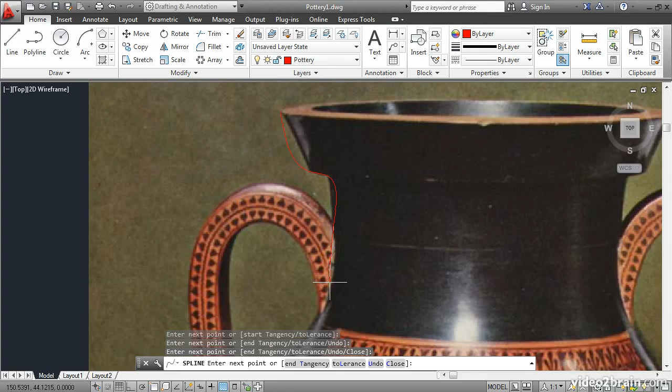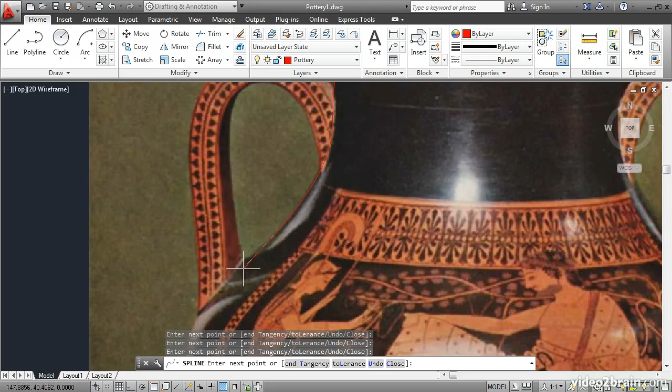Let's not worry about trying to represent the handles. Instead, we'll focus on the curve of the vase. Images disappear temporarily while you're panning. I'll pan up by dragging the mouse wheel and click some more points here, right on the edge of the vase.

I'll pan up by dragging the wheel, and we'll just come down here, click a few more points.

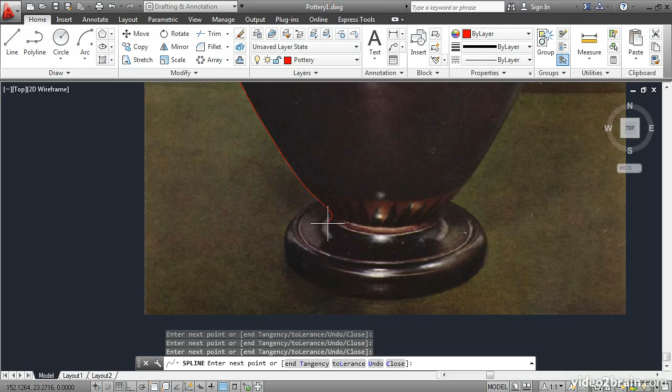Now, because this is a photograph that is underlaid in AutoCAD, we don't have a true representation of the elevation of this object. Instead, we have to kind of guess at how this base would look in perspective.

I'll click about here, have it go down, and then I'll have it go over to some imaginary point here in the middle, about here. Then I'll press Enter to end the spline command.

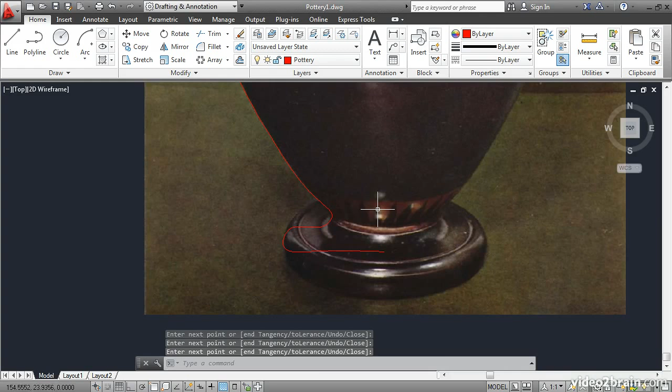I'll double-click the wheel to zoom extents, and let's try the Spline CV method on the right edge of the vase. Expand the Draw panel and click the Spline CV tool. Then zoom into the top, right edge, click the first point about here, and just work your way down.

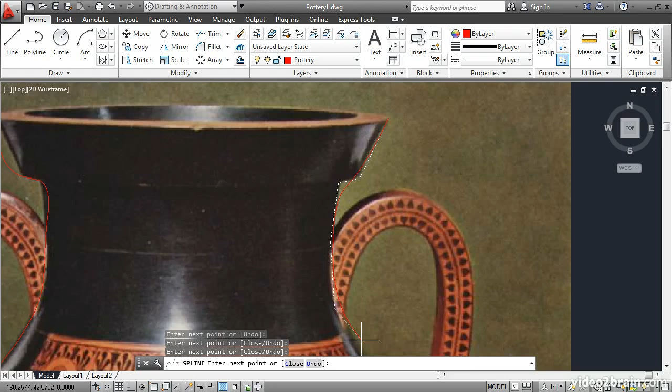Now this is a little bit different. You'll see a dashed white line appear. This is the spline lattice that you're drawing. The red line doesn't actually follow the curvature of the vase. Instead, it's the lattice that does. It's a series of control points that you're clicking, which are on the edge of the vase.

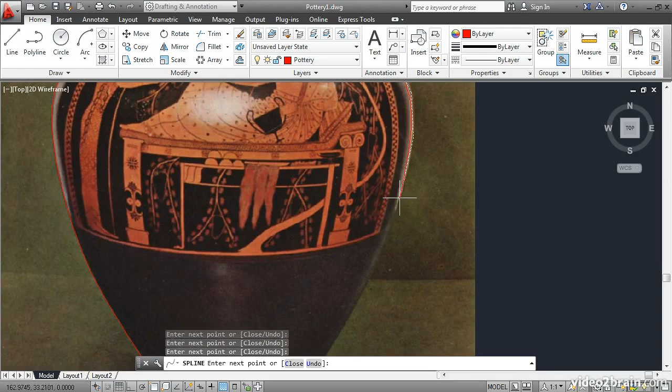So because of this, the CV method isn't the best one when you're tracing edges like this in a photo. See, the red line is inboard of the actual edge of the vase.

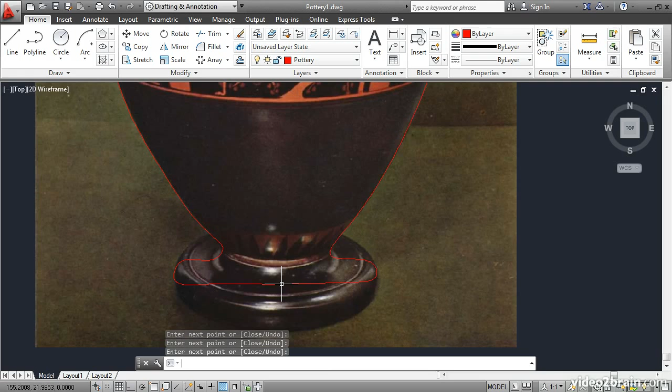I'll come down here and just complete what I started. About there, and press Enter. Now I'll double-click the mouse again to zoom extents.

Now of these two, I think I like the left spline better because it more closely matches the shape of the vase.

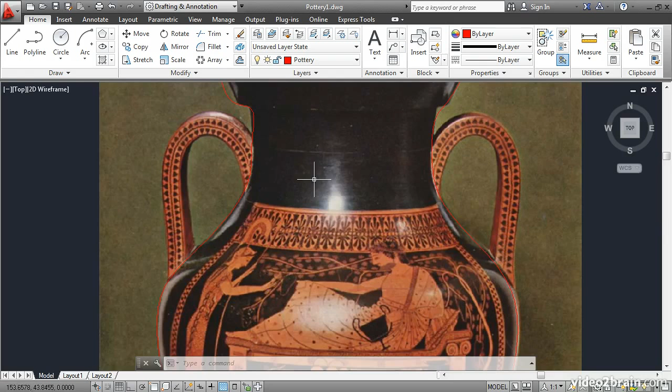Now I'll select it, and you can see the grips appear. These are the fit points, the actual points that I clicked earlier.

If you double-click the spline itself, you automatically launch the Spline Edit command. And here you can use some of the options to change the shape of the spline.

In particular, I'd like to introduce a kink into the fit data. So I'll use the fit data option, and then I'll click the kink option.

As I move the cursor, you can see an X appear on the spline. I'd like a kink to appear right about here. I'll click, and the kink exists.

It's hard to see that at this point, but just one click is all it takes to introduce a kink. Then I'll press Enter for exit, Enter again for exit, and enter a third time to exit the Spline Edit command. Then I'll come up here and select the object again, and I'll zoom in.

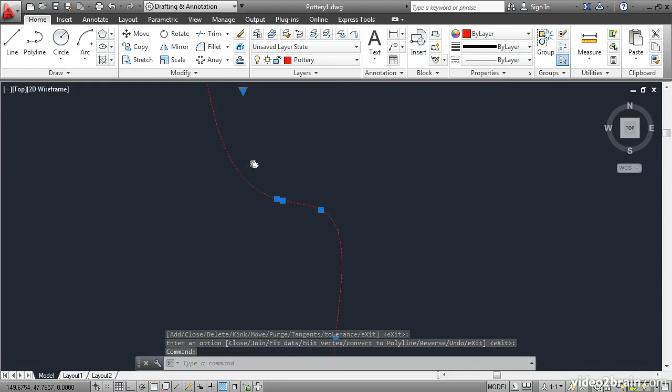You can see an additional fit point exists right here. That's the kink. I'll stretch this point by clicking on it and moving it. And now we have a curvature discontinuity here, and that's also known as a kink.

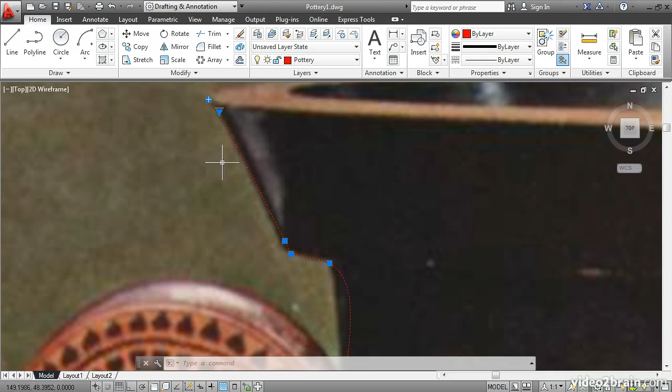This allowed me to have this sharp edge. Now, I could more closely match these fit points to the shape of the vase just by moving each fit point one at a time.

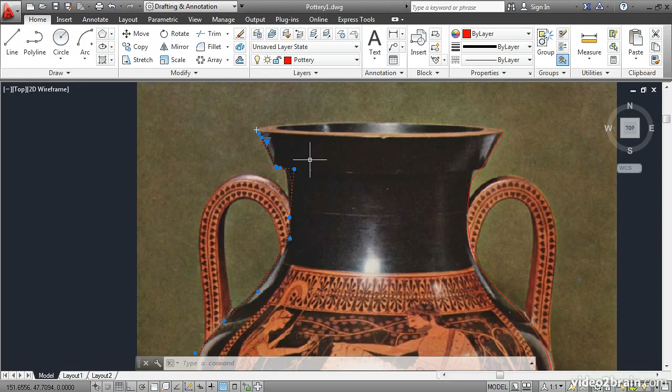But there's a more efficient way to do this, and that is to use this multifunctional grip to change the spline from a fit spline to a CV spline. When you do this, it doesn't change the shape of the existing spline. It merely changes where the grips are located.

Now we have a CV spline. It works the same as this other one over here. But we shaped it initially using fit point method. Now I can come in here and move these CVs around, and it gives me additional finer control over the placement of the curve.

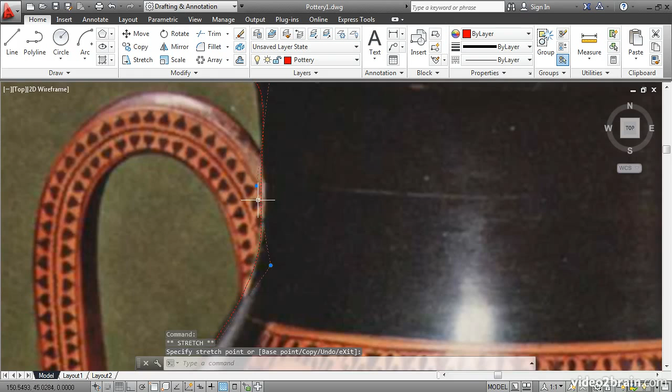I can move these around, and by positioning them just so, I can try to match the curvature to the vase. Now here I can't quite get it right. It's not really wanting to curve as much as I'd like it to.

And so what I'll do is double-click on the spline to launch the spline edit command. And this time I'll use the edit vertex option. And then I'll use the weight option.

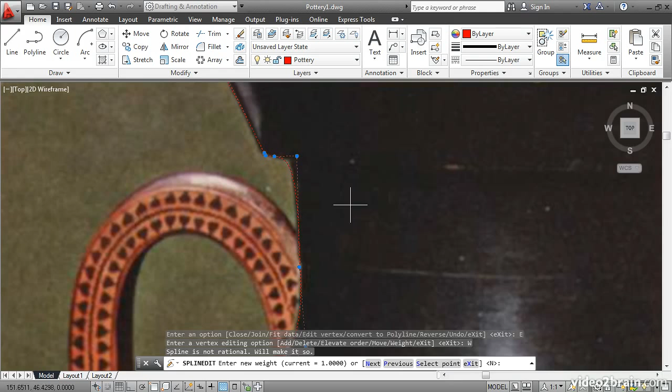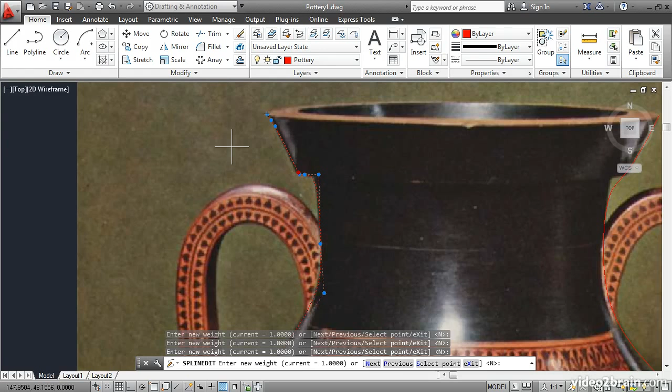To change the weight of a particular CV, you have to first select the CV, and you do this sequentially. The default option here says N, which means next. So I'll just press Enter, and this CV is highlighted. Press Enter again, the next one is highlighted. Keep pressing Enter until you get to the CV that you're interested in, namely this one.

Zoom in, and then you can enter a new weight value. All the CVs start with a weight of 1 by default. Let's try a weight of 2. I'll just type in 2, enter.

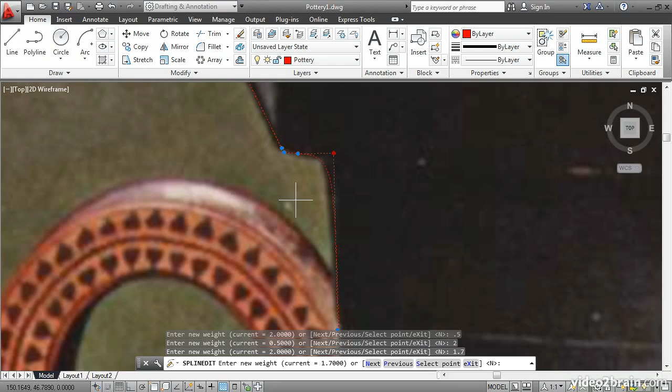And you can see that the spline is pulled closer to the CV. If I enter a weight of 0.5, the spline is pushed further away from the CV. So in this case, it looks like a value of maybe 2 or maybe 1.7 would be better. It's a little bit closer to the curvature here in the photograph.

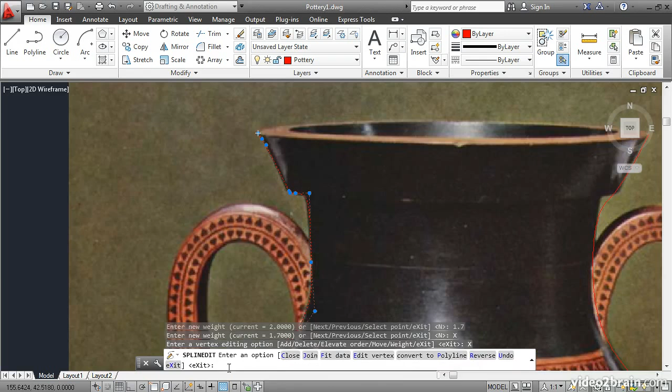So in this way, you can really dial in your spline object to match just about any curved surface. Now to get out of this command, we have to use the exit option, which is not the default. And then again, exit, and exit a third time to get back to the command line.

In this lesson, you have learned how to create both fit point and CV splines, and have understood their differences and particular advantages. In addition, you used the spline edit command to create a kink at a chosen point and added weight to a particular CV.